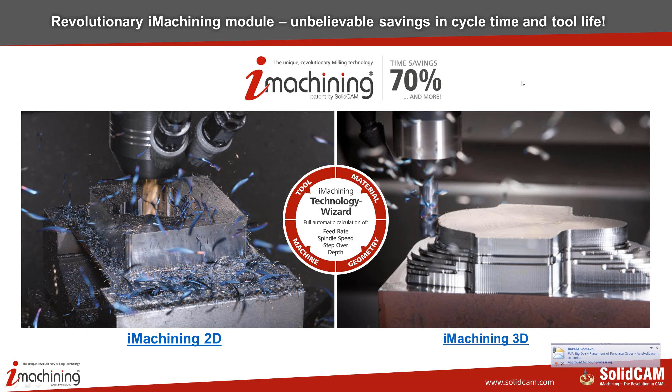Always we say the third ingredient from iMachining after iMachining 2D and 3D is the wizard. Because basically if iMachining was only about an advanced toolpath, it would really be a very small story, because it's very difficult for the customer to choose the feeds and speeds at which to work. But iMachining gives you more than this advanced toolpath that we see here on the left, the morphed spiral toolpath, which I will explain further later. It works together with the wizard, which provides optimal feeds and speeds at every point of the toolpath, taking into account the stock, the tool material properties, and also the machine specifications. So this combination enables you always to guarantee first part success. We take the responsibility to give you the best toolpath and also the optimal feeds and speeds.

To summarize the advantages of iMachining: first, increased productivity due to shorter cycles, time savings of 70% or more. And this has been proven in more than 3,000 customers already working with iMachining worldwide. You can also find on our website about 170 actual success stories of customers who saved a great amount of time using iMachining. In addition to saving so much time in cutting, iMachining produces dramatically increased tool life, and really this is dramatic.

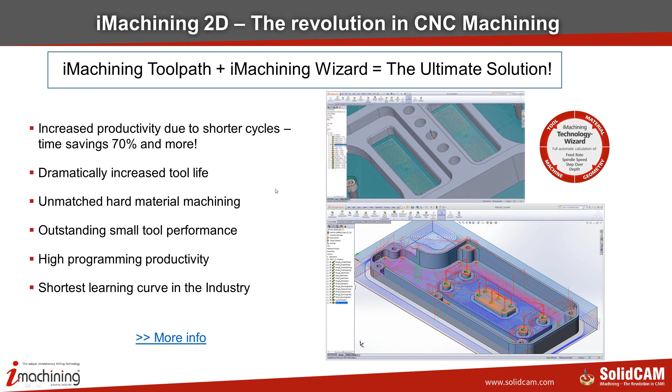Let's talk about the main points of iMachining. Let's first look at what are the main 3 problems with the standard toolpaths in 2.5D milling, the offset toolpaths, I call them, in pockets.

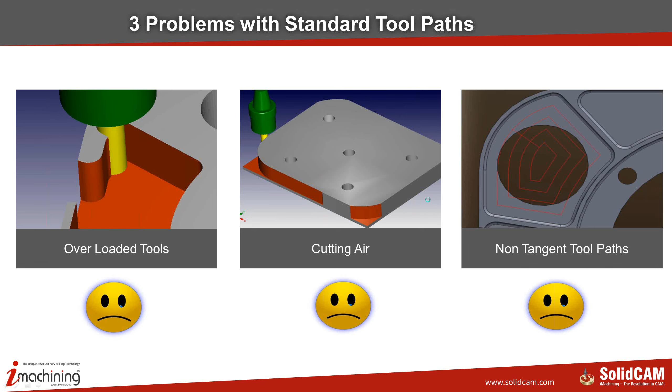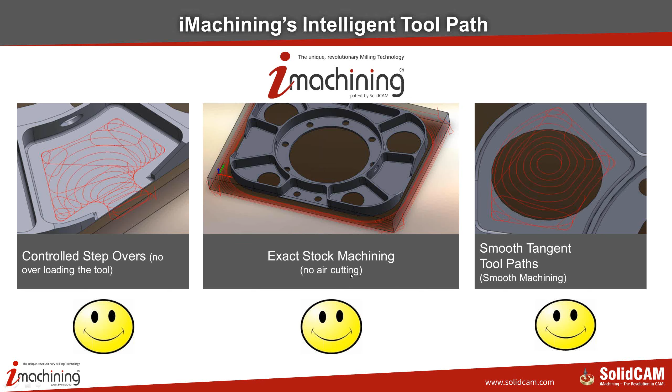Another major advantage of iMachining, shown in the middle, is exact stock machining, with no air cutting. Air cutting is reduced to the minimum of the minimum. We'll see this in the examples.

So all along the toolpath, while the cutting angle is changing between the minimum and the maximum, the feed rate is always changing, so that the net result is there is always a constant force applied on the tool. If the cutting angle is small, the feed becomes big. If the cutting angle is big, the feed becomes small.

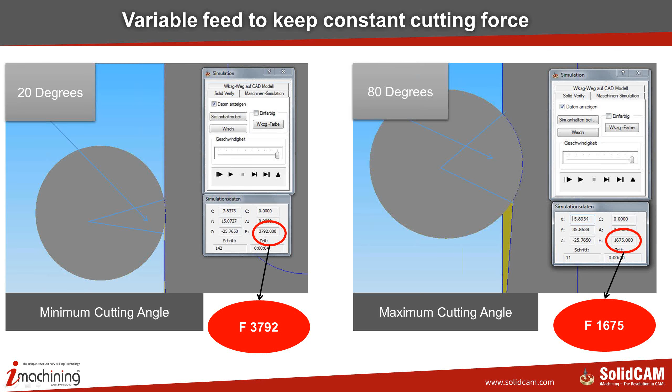We are the only CAM system that really knows what is the force applied on the tool at every point. That's why we are able to guarantee you first part success, and that's how the wizard is able to give you the optimal feeds and speeds, because we know the constant force applied on the tool all the time during the cutting.

By the way, iMachining is patented all over the world, and we have protection against people trying to imitate us. Although, even if we didn't have a patent, it would take them years and years to try to do something similar to us.

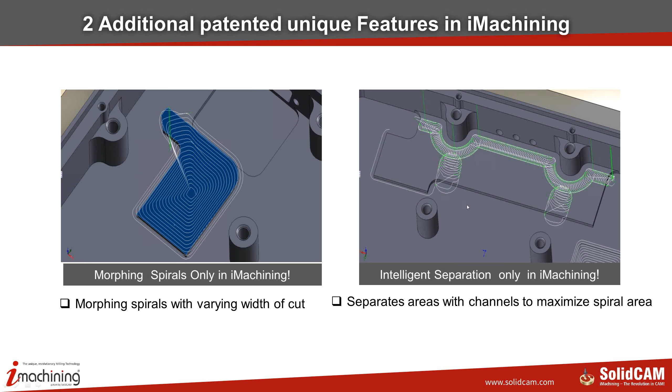What you see here on the picture on the right is what we call intelligent separation. iMachining looks at this long rectangle and decides it cannot be done with only one morphed spiral. So it uses channels, as you see here in white - these are toroidal toolpath channels - to separate this long area into 3 sub-areas.

And then each of the sub-areas is done using a morphed spiral. So in the end, this whole pocket is cut by a combination of morphed spiral toolpath and toroidal toolpath in the channels. But obviously, the most efficient is the morphed spiral, so always iMachining tries to do the maximum with morphed spiral. If it can do it, it will do 100% with morphed spiral.

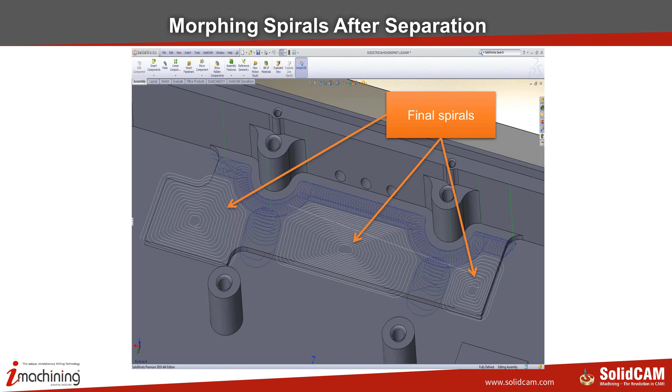If it cannot, as in this case, it uses the trochoidal to do the channels, or sometimes it uses trochoidal to do some of the rest machining. But always, the morphed spiral is about 80% to 100% of the cutting, and this is the most efficient toolpath.

Let's look here at a typical example of an electronic box, how the toolpath develops. It starts here in the center as a morphed spiral, as you see, and then it meets the 2 islands, so it generates separating channels around the 2 islands, and then you see it continues again to a morphed spiral until it meets this other island here on the left.

So here again it generates a separating channel around this island, and then it continues again to spiral. This is all done automatically, and another major advantage of iMachining is that not only does it do the rough, but it also handles the rest material in 2.5D machining, and then it does a finish cut as well, as you see on the bottom right. So with iMachining 2D, you can complete the pocket with the roughing, the rest roughing, and the finish. We are the only system that can do that using this type of toolpath.

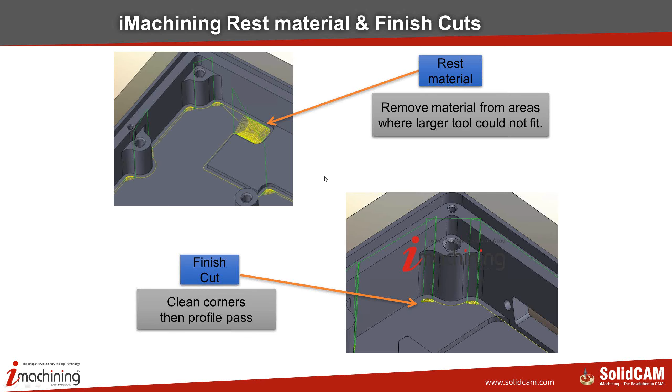Here we see another example where each one of the pockets is a closed pocket. You see the tool went in a helical way, and then it started doing a morphed spiral. But then when it reached this narrow area, it moved to trochoidal. So each one of these pockets was done as a combination of spiral and trochoidal. In the middle, you see it started with spiral, but then continued mainly in trochoidal because it's something very long and thin.

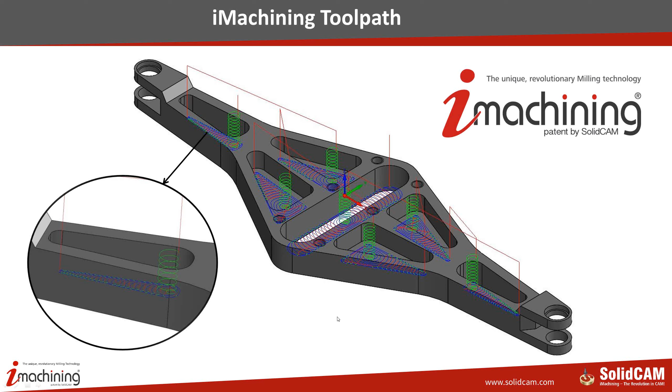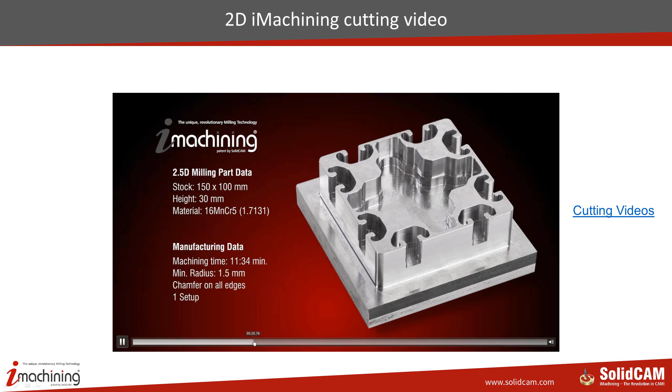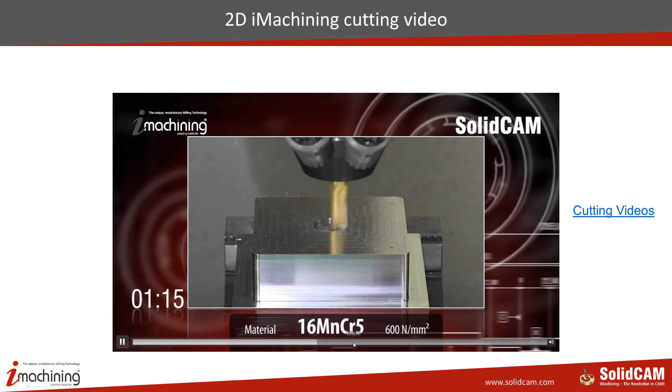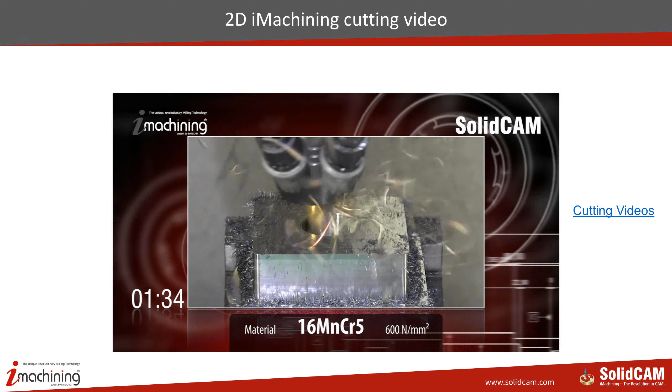Let me look just for a few seconds at some actual cutting to show you the results. I'm sure all of you have seen such videos, but let's look for a couple of seconds at this cutting of the steel part. As you see, iMachining cuts very deep, but with a small cutting angle. Now it's going in a helical way inside the material, and then it will start with the iMachining cutting. This is cutting steel, remember. Here we are seeing it in slow motion. As you see, the chips are always the same size.

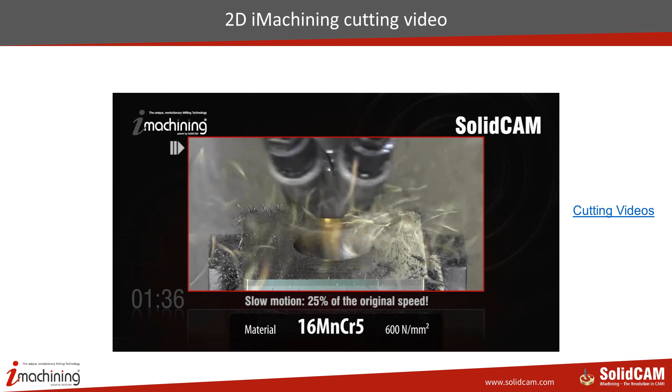Okay, so now we looked at the toolpath. Now let's look at another major aspect of iMachining, the wizard.

If you are doing the cutting without iMachining, and you wanted to guess the feeds and speeds that are best, you have to take into account all the following properties. First, the material properties - clearly the hardness of the material and other properties. Also the properties of the tool. Obviously the depth also that you are going to cut. And then last but not least, the machine specification: maximum spin allowed, maximum feed, maximum power. So you can imagine trying manually to think about all these parameters, take them into account, and guess the optimal feeds and speeds - it's mission impossible, even if you have tens of years of machining experience.

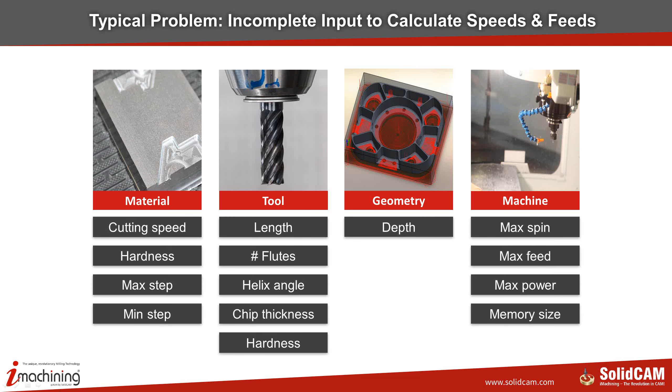You always meet a new material that you didn't cut before, a new type of tool, a new machine. Well, with our wizard, we take the guessing out of the game. Because since we generate the tool path, and as I explained to you, we know how to keep a constant force on the tool the whole time, we can calculate the optimal feeds and speeds. Taking into account the depth of the geometry, the tool properties, the machine properties, and the material properties, we give you at every point of the iMachining toolpath the optimal feed and spindle speed and the depth.

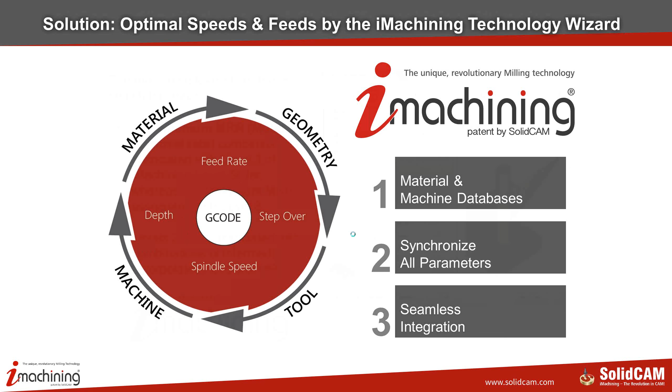So the question is, why not always go to level 8? Because sometimes it's a new material that you are cutting and you are not so sure that you want the first part you cut to work at the maximum speed. You might not be so sure of your clamping, that it is sturdy enough to work the fastest. So always, you could first cut the first part using machining level 3 or 4, and then, looking at the results, you could increase it to 8, and could even have 8 turbo - it's even faster. So, as a user, this is the only thing that you have to control about the aggressiveness of machining, and then iMachining does all the rest.

We tell you that we guarantee always iMachining first pass success, because we are giving you everything - the tool path and the cutting conditions - automatically.

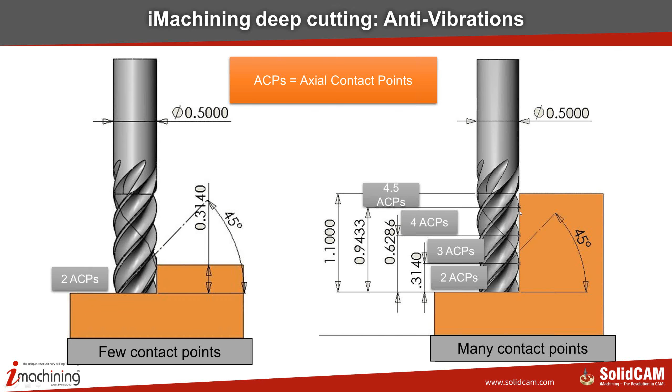Another point that the wizard makes sure of, since we are cutting deep, and this is one of the characteristics of iMachining, we always cut deep and fast, but small cutting angle. We make sure that the ACPs, the axial contact points, are an integer number, like 2 or 3 or 4, so that there is enough support for the tool to avoid vibrations.

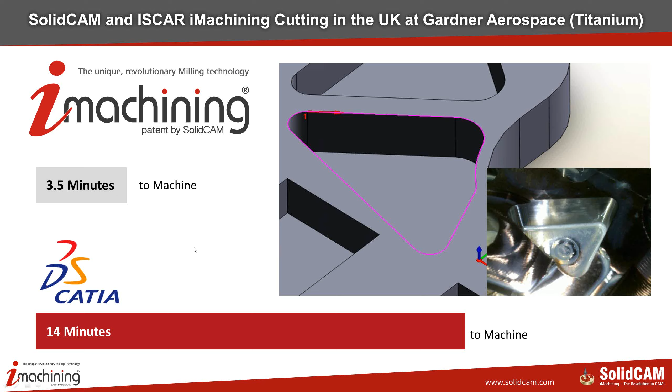Just a small example of a cutting we have done in the UK at a company called Gardner Aerospace in titanium. They were using CATIA CAM, and to cut this pocket you see here in titanium took them 14 minutes. Our reseller in the UK came with iMachining, and he cut the time from 14 minutes to 3.5 minutes. Unbelievable, but this is the case. Let's look at some more examples.

Here is another customer. There is a misconception that iMachining is good mainly for cutting hard metals. Not true. With aluminum, you could also save a lot. Here is an example of iMachining 2D cutting in aluminum. Customer had 400 pieces to produce. His standard cutting time using our standard 2.5D milling was 17 minutes. With iMachining, he reduced it to 6 minutes. 65% saving, and total cycle time saving for 400 pieces, 73 hours of machine time. And obviously, we didn't mention it here, he used much less tools to do the cutting. As we said, iMachining saves a lot in tool life.

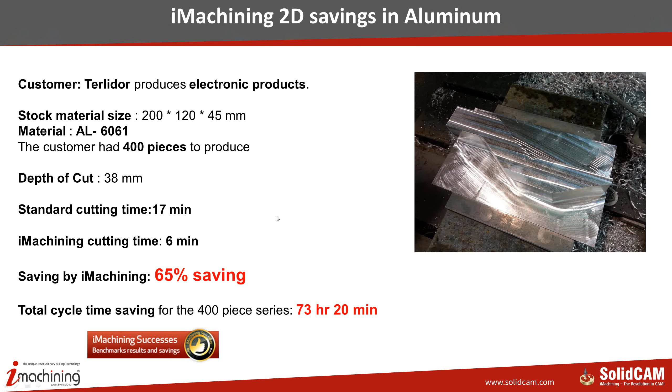Let's look at another example of a customer cutting in titanium. He had 75 pieces to produce. His standard cutting time with our 2.5D was 17 minutes. With iMachining 2D, he cut the time to 3.5 minutes. Even more saving than in aluminum. In titanium, he saved 80%. And for 75 parts, he saved 16 hours and 52 minutes. Unbelievable savings, but these are true customer stories.

And now Sydney will take over and show you some more such stories with actual looking at the software itself. Sydney, take over.

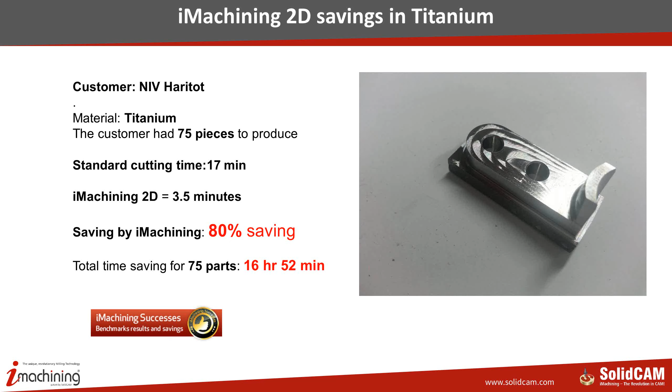Okay, do you see my screen? Okay, one moment, please. Okay. There we go. Okay.

What we're going to do now is I'm going to be showing you a couple of parts that I have. Now, these parts that I will be showing you are actual parts from our customers. Now, what I'll be showing you is as follows. These parts, they first were cutting before they had iMachining. They were first cutting them using the conventional 2.5D pocket and profile operations that we have in SolidCAM. And then we came along with iMachining and showed them what they could do in iMachining, and then they programmed the parts in iMachining. And as we go through the parts, we'll see what kind of savings it actually had on the parts itself.

Now, this first part that I'm showing you over here is a part that's made of 4340 material. We know that's kind of a hard material. In this particular case, the 4340 was at 40 Rockwell, and he had to do a total of 200 of these parts. Now, obviously, when you're doing that amount, you're trying to save as much time as possible. And he started programming the parts using a face mill operation, and then he started with a pocket operation.

The tool that he used over here was a 12 millimeter end mill that was outside of the holder by 60 millimeters. Now, if you also go into the data of the tool, you can see that he was working at a feed rate of 450 millimeters per minute, which is pretty aggressive when you're talking about this type of material, but not as aggressive as we could get. The reason why it couldn't go any further to be more aggressive, we'll see that in a few moments.

If we go into our levels, you'll note that our pocket depth that has to go down is 40 millimeters. Now, cutting into this type of material, the maximum step down that he was able to go down without causing any problems to the tool itself was 4 millimeters.

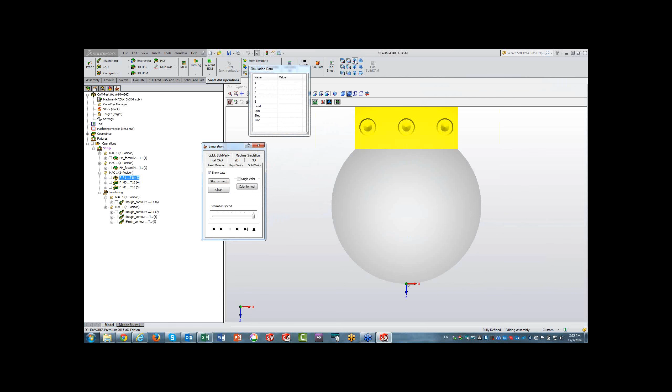And if we take a look at the actual simulation, and I'll use SolidVerify to show the simulation itself, you'll see the following. This is the actual stock material as shown over here. This is actually turned out with a dovetail in the back to go into the fixture itself. And we'll start step by step.

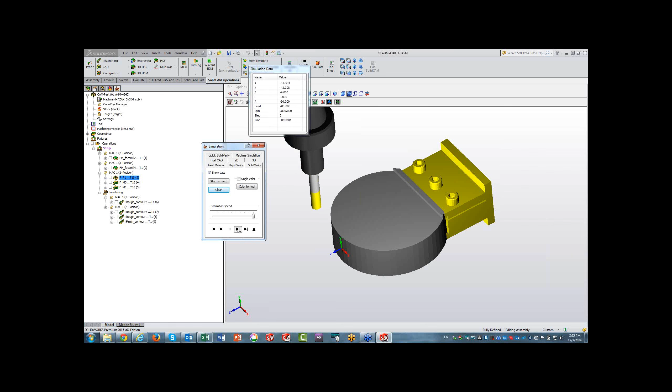If we go step by step, you'll see the tool goes down. And the first thing it does when it gets to its depth at -4, it goes into the material itself. Now, at this point, you can see that we're going with the full 180 degrees of the tool into the material itself, with the full brunt of the tool right into the material itself.

When doing so, you cannot go fast, and you cannot go to the full length of the tool. If you would do that, this would cause a lot of vibration on the tool itself. So you can only go a small amount as far as depth goes, and your feed rate has to be limited because of this condition. So this is exactly what happened in this particular case.

Now, as we go around the part itself, you'll note that it always has those areas when it goes into these areas and the corners. Let me actually stop now it's getting close to those areas. We can see this over here. There's always times where it goes into areas such as those corners with the full brunt of the tool, the full 180 degrees.

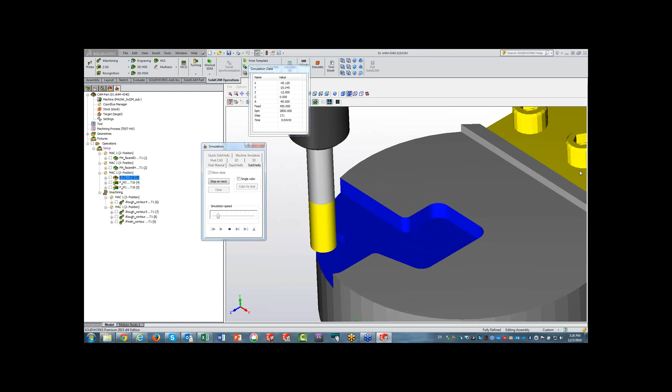So we constantly have to watch to make sure that we're not going too fast, or else we may end up breaking the tool. So this forces us actually to work a lot slower than we would like to. Okay, now let me actually run the entire simulation of everything that the customer did.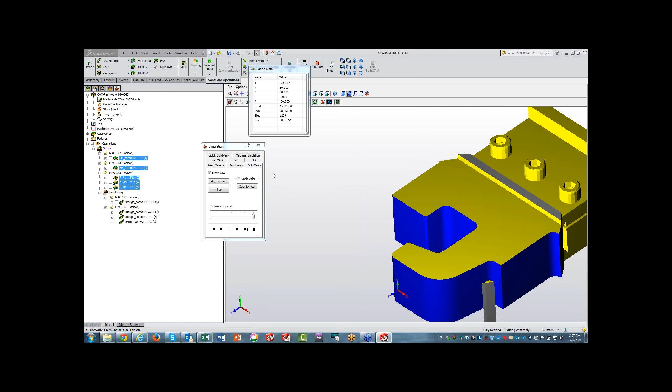And what we'll note in particular is the actual machining time. The actual machining time that he had was a total of approximately 44 minutes as shown over here. Now remember that value, because we're going to get back to it later on. Okay, now that we did that, let's see exactly what we did when we went over to iMachining.

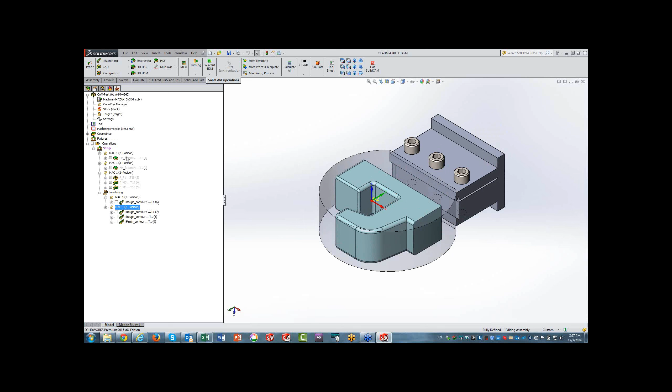Let me take these operations over here, and I'll suppress them so we can see just the operations that we did. First, instead of the face mill, we replaced that with iMachining on both sides. I'm just going to show you right now the toolpath that we had on both sides. What we have on this side is exactly what we have on the other side.

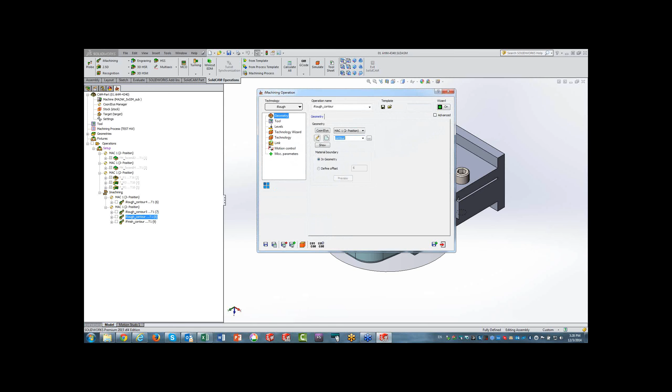But I'd like to go now into the next operation and show you some of the parameters that we used. The next operation, if we go into it, we'll take a look from the top view. First, let's take a look at the geometry. The geometry includes this entire area, this area outside over here, as well as this area in here, and this area inside. This is all one operation. Okay, so that's as far as our geometry goes.

The tool, you can see it's also sticking out of the holder at 60 millimeters. Now let's go to our levels. You'll note that we're going to a depth of 42 millimeters. Now remember, last time we went down every 4 millimeters. But now if I go into my technology wizard, you'll note the technology wizard automatically gives it a step down of 21 millimeters.

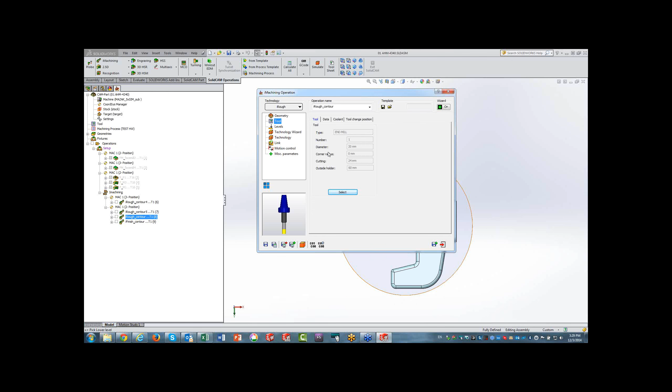This is based on two factors. One, if I go back to the tool, the cutting length of the tool itself, that was 24 millimeters. And the level that has to go down, 42. So by taking that into account, the technology wizard automatically recognizes that it can go down 21 millimeters each time, in other words, 2 times. So it covered this in 2 down steps. Now also note the feed rate over here, a lot quicker than the 450 millimeters that we had before.

Now, not only that, let's take a look at the machining level. I'm using an aggressiveness of level 5. Okay? Not too aggressive, not too shabby either. If I were to actually bring this down, you can see the values over here change. The more aggressive I get, the values over here go higher. This is automatically calculated within the wizard itself.

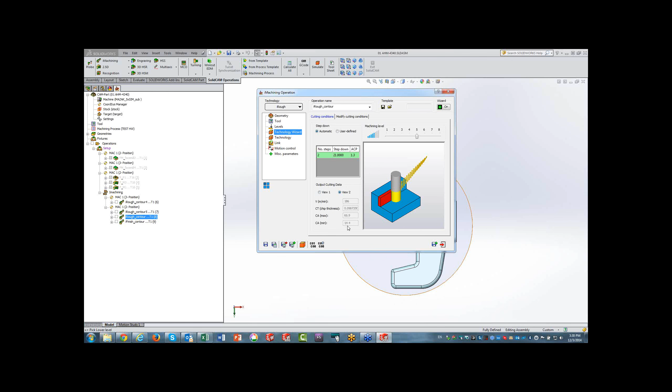Also, we should note one more parameter inside the wizard itself. That's the cutting angle. This is exactly what Emil was talking about before: we control the minimum and maximum cutting angle, the actual engagement angle of the tool into the material itself. Now, I'm going to run the simulation, and as you run the simulation, we're going to take a look at a few aspects of the cut itself. I'll run the simulation of this particular operation, and then we'll run it on the entire part.

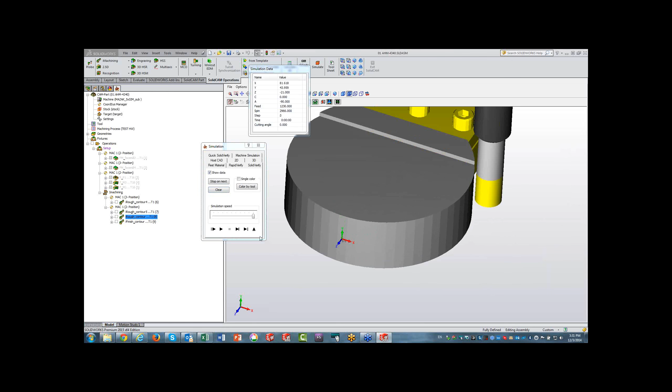Now, as you see, the tool is going down. One step at a time, I'm going to do this. Note it's going down 21 millimeters. Now, if we take a look at the tool itself, as it's making contact with the material, look at the cutting angle. It started off at a smaller cutting angle, and it's going up to its upper cutting angle, as shown over here. You can see it's going up to a cutting angle of 68 degrees. As it's going around the part, you can see at points it changes, gets lower.

Now, as it gets lower, the feed rate also gets higher. This keeps a constant chip load on the tool itself. By doing so, you're not getting any kind of vibration on the tool. By doing that, you're also making the tool life a lot longer, because we all know that what actually breaks up the tool is vibration. This is exactly what we're avoiding over here.

By keeping a constant load on the tool itself, you will not get any vibration, and therefore everything will be equal all along, and you'll always get that nice smooth cut without any kind of vibration. And because of that, your tool will last a lot longer.

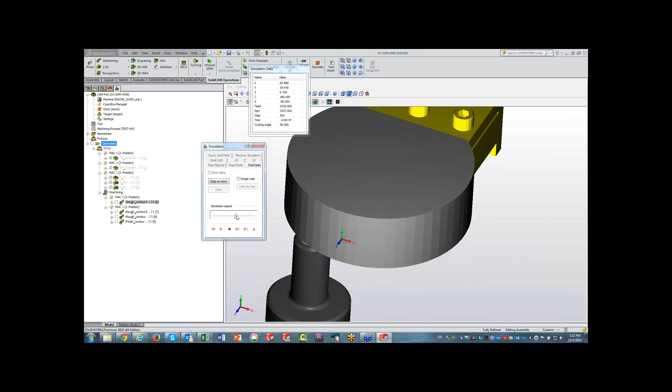Now let me actually run the simulation on the entire part. As you see, we did the bottom over there. In a moment you'll see it'll go up to the top, as shown over here, doing that trochoidal tool path on top, going from one side to the other because it has a wall over there. So doing its complete trochoidal cut, and then doing what I showed you before.

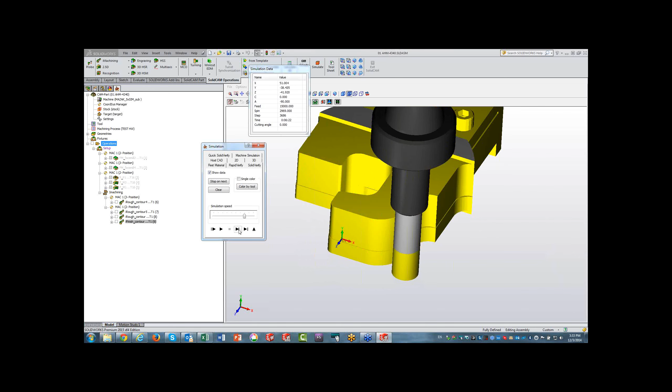And not only that, but you'll see now it's actually doing a finish cut around the part itself. First clearing out the corners, and then going back to the beginning, as shown over here, and then doing a finish cut around the entire part.

Now, take a look at the time. The time here is just under 7 minutes. If we remember, with the regular standard milling we had approximately 44 minutes, but compared to what we have now of about 7 minutes, you're saving approximately 84% in this particular case. Try figuring that out across 200 parts. Well, we'll talk about that at the end, exactly what was saved over here. But now, let's go to our next part.

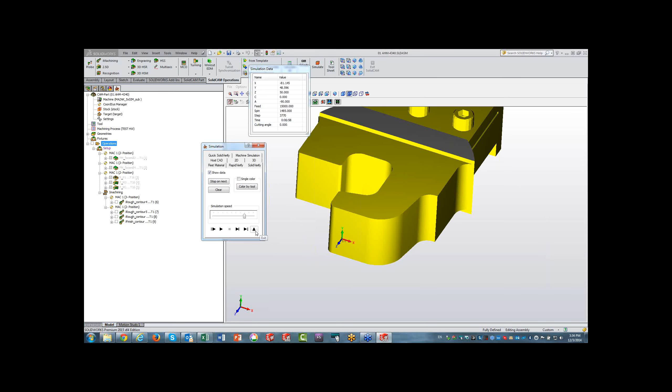I'll close this part and we'll open up my second part. Now, this particular part is a typical deep electronic box. This electronic box is made of aluminum. And as Emil had mentioned before, the savings are not only on steel or titanium, it's also on aluminum as well. And this is exactly what happened in this particular case.

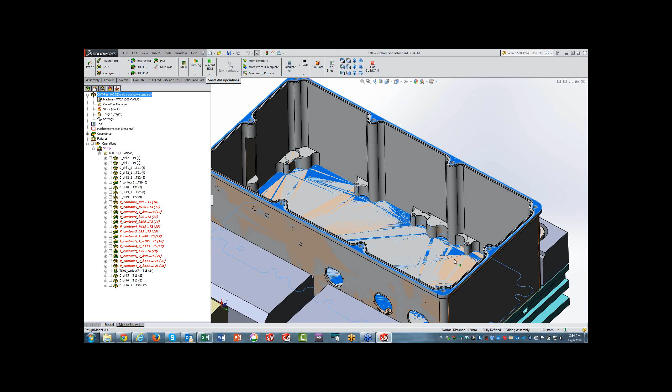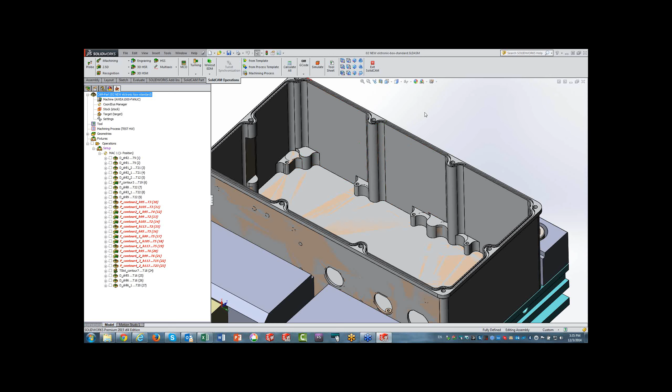Now, what's so special about this particular electronic box is that the pocket itself is very deep. It's approximately 113 millimeters deep. So immediately that's telling us that we have to work with very long tools. Even in these areas where we have smaller radiuses, we have to work with long tools. And because of that, we cannot take a large step down, and we cannot work too quickly either, even though it's aluminum. So let's first take a look at the operations that the customer himself did.

Now, in this particular case, he had to do a total of 140 parts in this batch run. Okay? Now, we have, of course, drilling operations that he had to do at the beginning and at the end, but we're going to concentrate now on the operations that we replaced for him. We first started out with the regular pocket operations and the profile operations. Let's take a look what was done over here in the simulation itself.

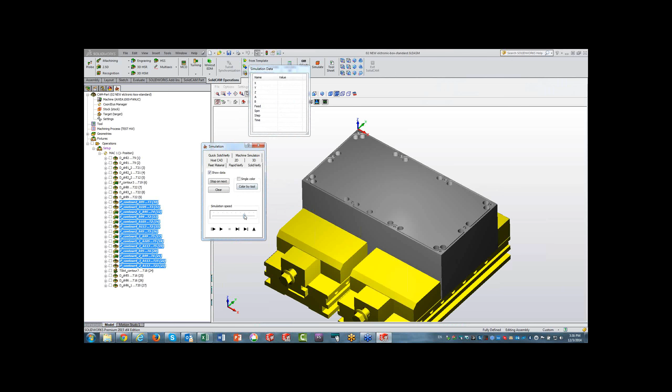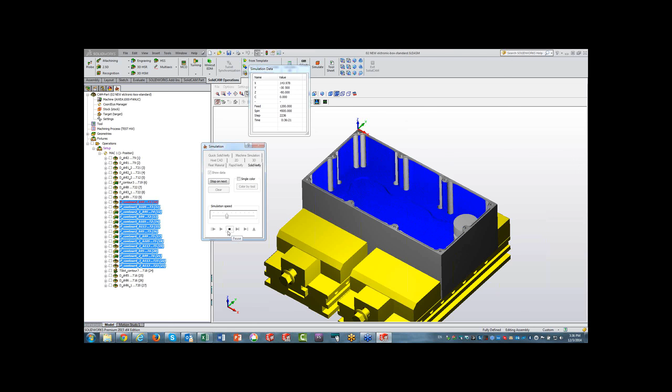We'll run our simulation, again using SolidVerify, and you'll see the first tool that he used in this particular case was actually a face mill to cover as much ground as he can, but with the face mill you can't go too deep. So he went as deep as he can possibly go in this particular part with this tool and covered the entire depth of that particular part using this tool. As he goes further down, we'll show this in a moment, he uses longer tools to get down to those corners, using profile and pocket operations to clear everything that he needed.

Now, if we take a look at the time in this particular case, it took him 2 hours and 16 minutes to do this particular part. Okay, and we're talking right now just about the profile and pocket operations. What I'm going to do now is load the part again, but this time with operations done in iMachining. When we came back to the customer with iMachining, this is what the result was, and this is how we actually cut the part at the very end. Okay.

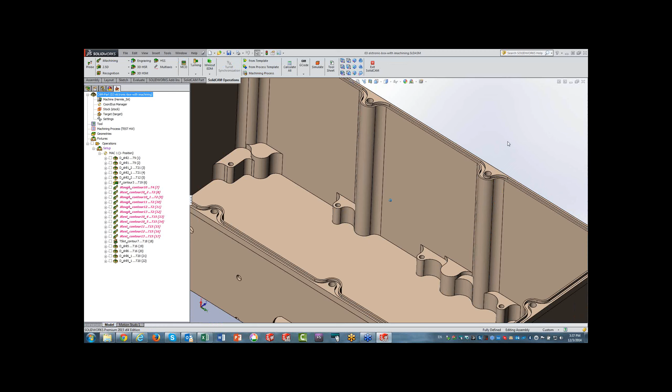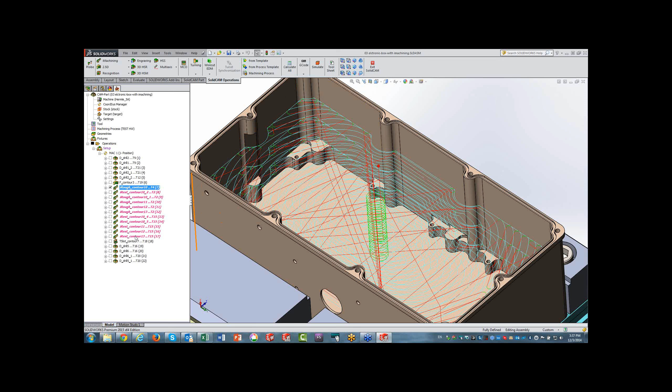If I were to just show you right now the tool path on this first operation over here, you'll see that, as Emil had tried to show you before in the diagram, it's actually doing a trochoidal tool path over here, and then in the corners when it finishes doing that morph spiral tool path, at the end it goes into trochoidal tool path. Actually, let me run the simulation, and by running the simulation we can see exactly what's going on over here.

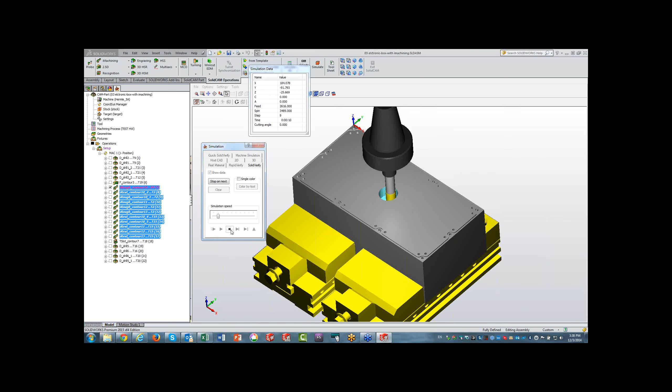I'll do this slowly, and what's happening at the very beginning is as follows. First of all, as it's going into the part, it's actually doing a helical cut into the center of the part. In other words, if you didn't have a drill operation done here before, no problem at all. It'll just do it automatically using the helical cut. Once it gets to its depth, it's doing that morphed spiral cut into the part. And also note what happens with the feed rate. The feed rate in these areas is higher, and in these areas where it's a thicker cut, it's running slower. So the load on the tool is constant. And you can see the cutting angle being changed from its minimum to maximum throughout the part.

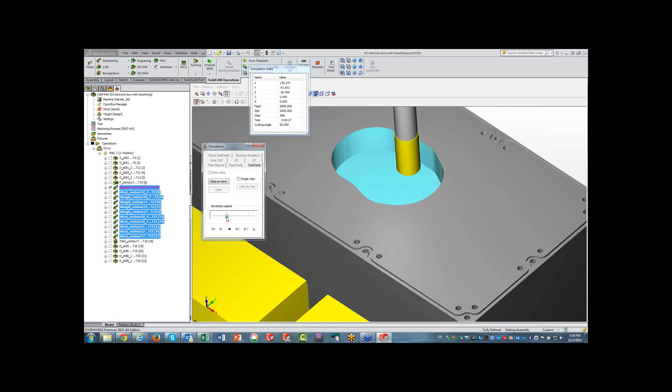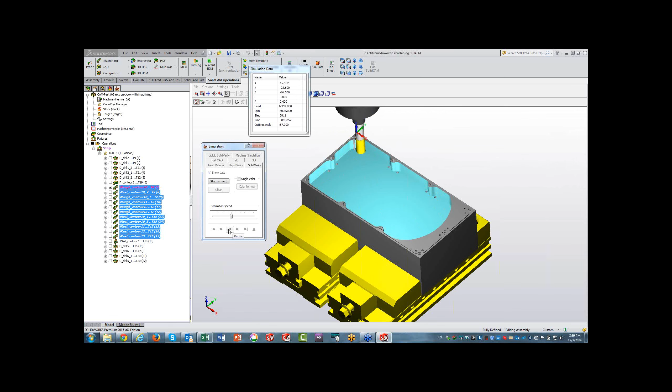Let me go now a little faster, and you can see it's doing that constant morph spiral, changing the shape of that tool path, but keeping the constant spiral over there. Now note, once it gets to its maximum that it can with the spiral, it's actually doing that trochoidal cut into those corners over there. Same thing over there. Now let me stop it over here and do this one step at a time. You can see the control that it's taking as far as the cutting angle. Complete control of the cutting angle, no chance of it ever going into over-engagement of the tool.

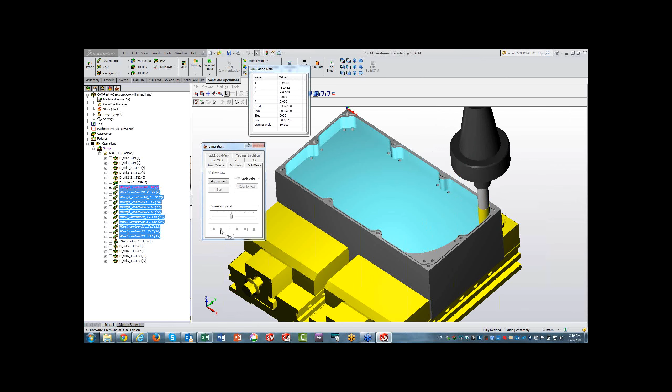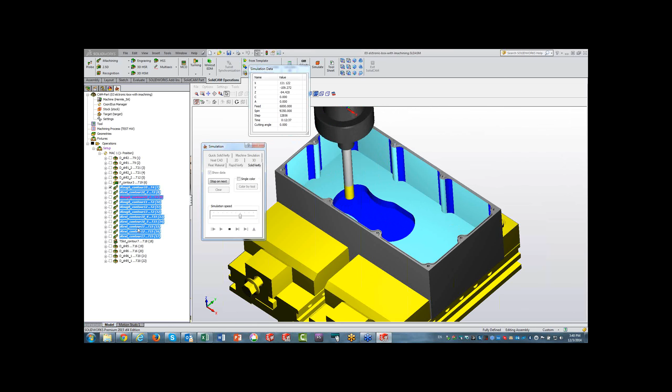Continuing on the part, you can see it going through that entire area over here, going down now to its next step, and because it works this way, each step down can be much larger than we had in the previous cases. Let's run this now towards the end, because over here, not only are we doing regular rough cuts, but we're also doing rest machining as well to clear out the corners. And we'll get to that in a moment as we get towards the end of those rough cuts as shown over here.

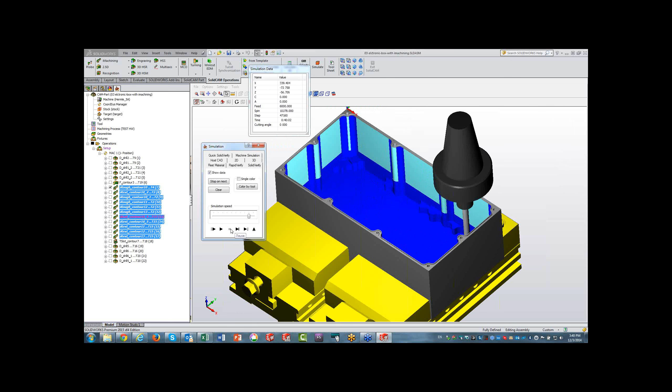Going down to those pockets at the very, very bottom. And now it's going to start doing the rest machining into the corners itself. And you know it's working with a very long tool but a small tool. But because of the way we can work a lot faster than you were able to do in your regular 2.5D conventional method. Now, the total time in this case was approximately 45 minutes as shown over here, as compared to 2 hours and 16 minutes we had before.

In this particular case, it was a savings of approximately 67% of what we had before. We'll get back to the amount we saved between the two towards the end, but now let me get to the next part. The next part I'm going to show you will be this part over here, which is also a part where the material was 4340 with a 40 Rockwell on the part. So again, it was a pretty tough part. Okay. Now the batch run in this particular case, he had to do 120 parts in this particular run.

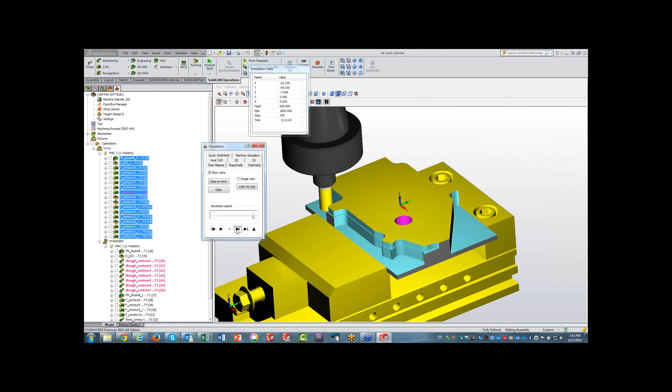Instead of doing a complete profile around, he avoided that, because if you do a regular 2.5D operation with a regular profile operation, you would have a lot of air cuts around. So he was actually being as efficient as he possibly can by breaking it up into different operations. But each one of those is a separate operation, something that we do not have to do in iMachining, and we'll see that in a few moments. As you can see, he did every single corner as shown over here, every single area that he had to go really deep. And then at this point, he was actually doing a regular profile operation going around the part itself. Now, note, now he's going to do his pocket operation inside over here.

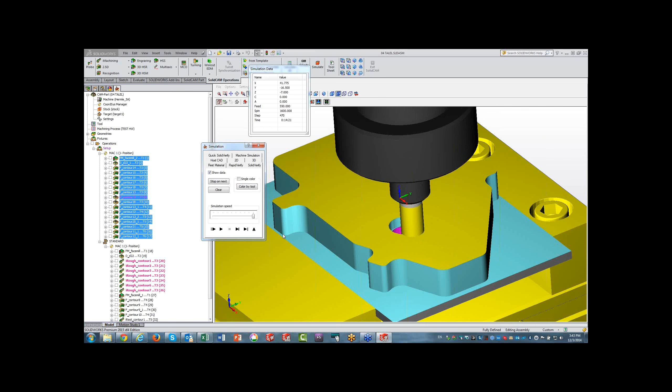Now, he'll go down into the hole that he drilled out, as shown over here. Then, however, when it actually goes into the material, he's going with the full brunt of the tool into the material itself, so he cannot take deep cuts. We'll run it again towards the end in this particular case. You can see that this is the entire part being machined, and we'll take a look at the time. The time in this particular case was 26, almost 27 minutes. Okay? Now let's take a look at how he did it afterwards once he had iMachining.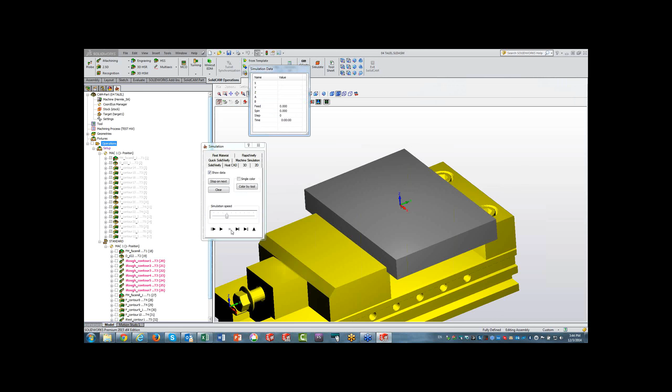Let's just suppress these operations over here. Here we go, suppress. And we'll run a simulation with the iMachining operations. Now note, we have our face mill, we have our drilling operation, as shown over here. But now note what happens with the iMachining. Remember previously, he did each of the corners and these areas separately. This is going to be done now in one simple operation of iMachining as shown over here, where it first clears out the corners automatically. It knows where there's extra material over there.

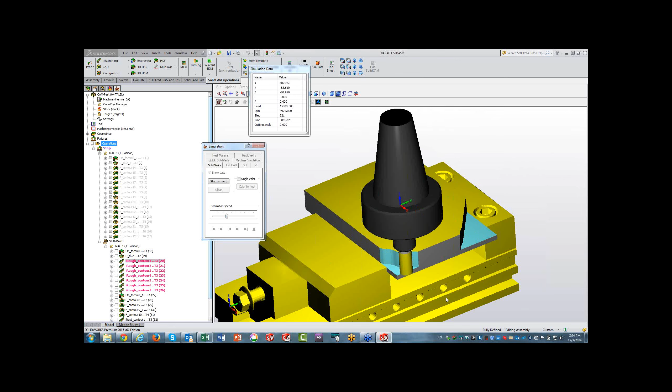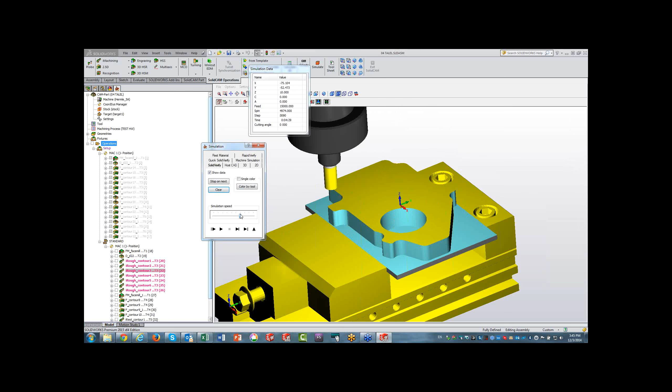So first those trapezoidal cuts in the corners, making way for it to work as it's showing now, doing that spiral cut, that's morphed spiral cut around the part. So we try to get as much as possible in that spiral cut over there. The same thing over here. He'll go into that hole automatically and do the spiral cuts. Now let's run this to the very end. And in this particular case, the time that it took him once he was using the iMachining operations was a total of 11.5 minutes. If we take a look at the actual time we had before on this particular part of about 27 minutes compared to what we have now, it's a total savings of approximately 57%.

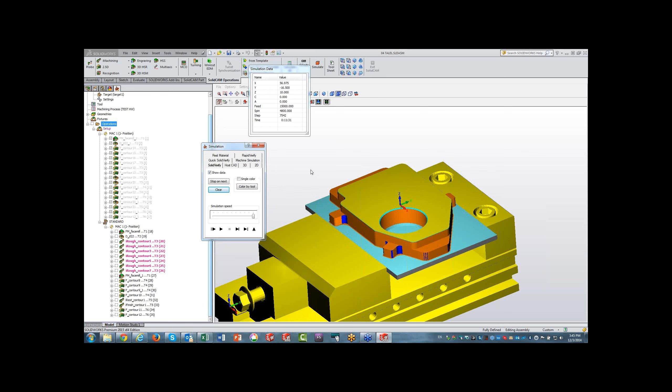And remember, doing that on a batch of 120 parts. Okay? Now we'll get back to that again, as I said, at the end. But now let's get to our last part. If I were to open up the last part itself, this part is actually a part that was done in titanium. Now we all know when a machinist hears the word titanium, he starts scratching himself. He says, oh my God, I got to cut titanium. One of the toughest materials that's out there to cut.

You need special cutting conditions, this extra fluid, very good fluid coolant, and the proper tools. You can't go too fast, you can't go too deep. All of this is problematic with titanium, and you have to know exactly what you're doing. You have to have a lot of experience cutting this correctly, and not only that, you cannot go too fast.

Now, if we take a look at the part itself. One more point as far as this particular batch the customer had, he had a first run batch in this case of 500 parts. Any amount he would save over here would be a blessing. So let's take a look at what he did.

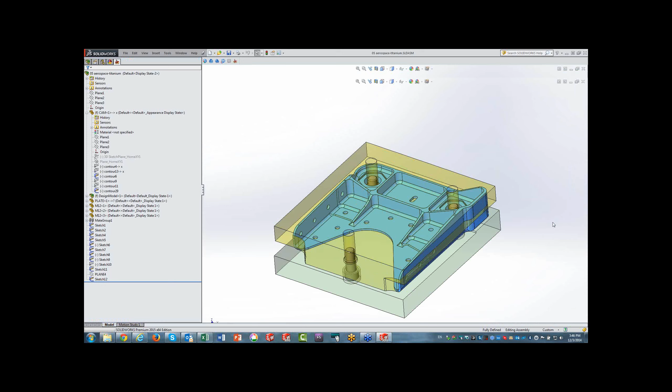Now, looking at the part, before I continue, if I was to open up the part itself, you can see it's basically just a lot of pockets in here, but there's a lot of material that has to be removed. That's the actual part.

So let's start by running our simulation on the operations that he first did of the pockets and the profile operations as shown over here. Now we're showing you what was replaced as far as the rough cuts on this part itself. Using the 2.5D basic operations, running the simulation using SolidVerify, you'll see the following.

The first thing he did was work on this side over here. Note, as he's working, he worked straight across, but when he gets to this area over here, he's coming with the full brunt of the tool into the part itself. Note also, when he gets to this side, he's going straight in. So that's not the best way to cut, but he had no other choice. The way he has to do it is take small step downs and work slowly, finishing this part itself.

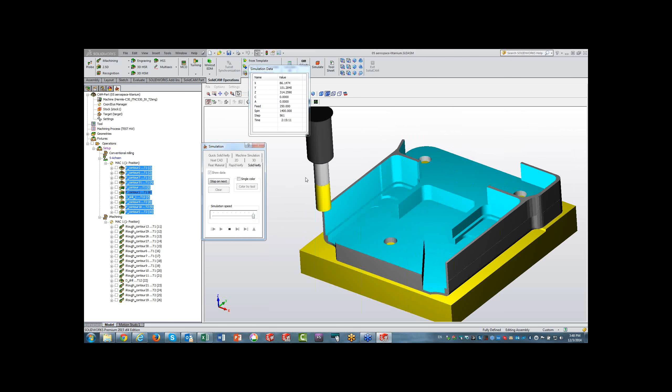Let's go now towards the very end. You can see everything was machined out that he had to do. It took him a total of just over 2.5 hours, 2 hours and 33 minutes. Remember, he's doing a total of 500 parts.

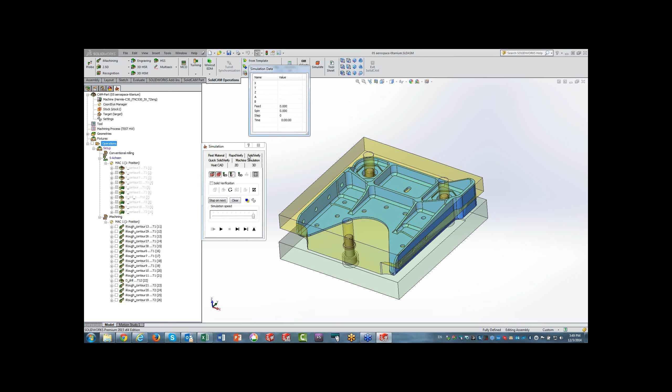Now let's take a look at what we did in iMachining, how we helped him out. Remember, any savings he got on this part was a blessing. Now let's run our simulation using SolidVerify, and we'll start off with the first operation.

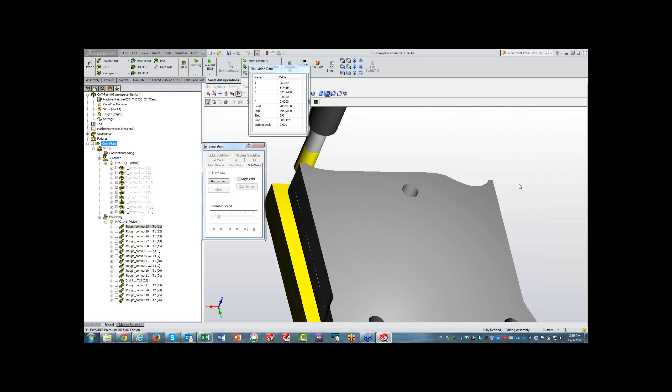As you see, when it starts working in this area over here, it uses that trochoidal step over. You can see it has a constant angle, never over-engaging the tool. When it gets to the end, it repositions itself quickly back to the beginning over here. So it doesn't go into the material itself, rather repositions itself and always keeps that angle, never going above the maximum angle in this particular case.

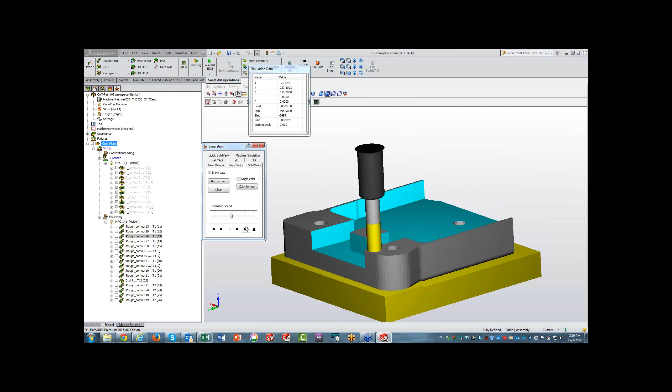Now let's run it a little quicker as we get further into the part itself. He finished that side, then he did the other side as shown over here, doing again those trochoidal cuts, cutting into that area as well as around over here. Doing the next area around this area over here, again using trochoidal cuts. He left himself an area over here that was a complete island cut over here. By doing that, he was actually able to do a morph spiral around that area.

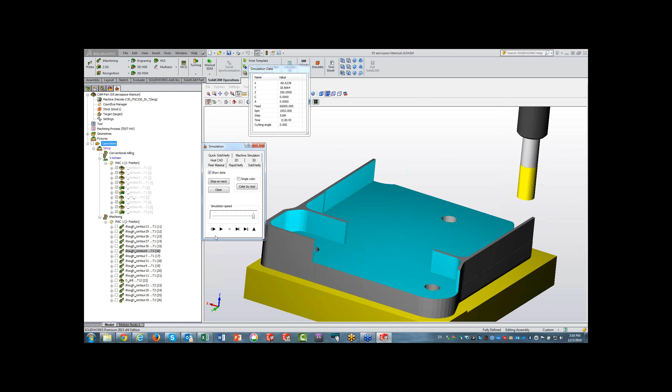Now let's actually finish the simulation and see what the result was in this particular case. You can see the time over here was 57, just about 58 minutes, as compared to what we had before of 2.5 hours. That's a total of 62% savings. Now we're talking about 500 parts just on the first batch run.

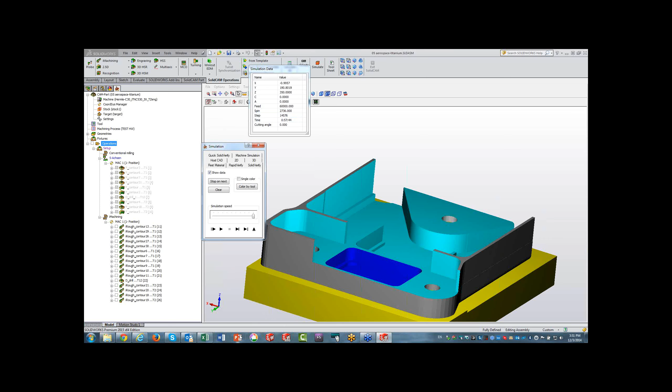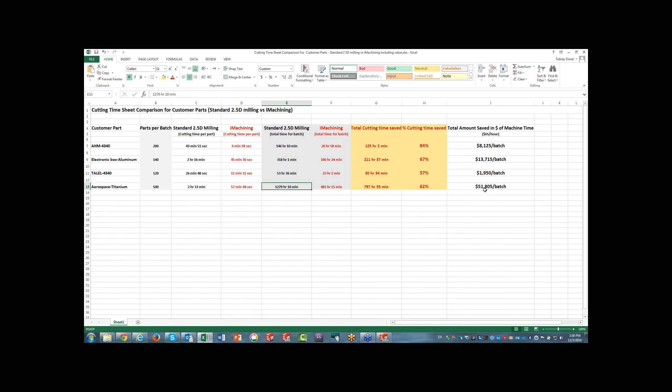Emil had mentioned before about success stories. If we go into our SolidCAM site, we have in our iMachining section all of the success stories from different companies. It's all listed here. I invite everyone to go in here, read the success stories from all of these companies, and you'll see exactly what we're talking about.